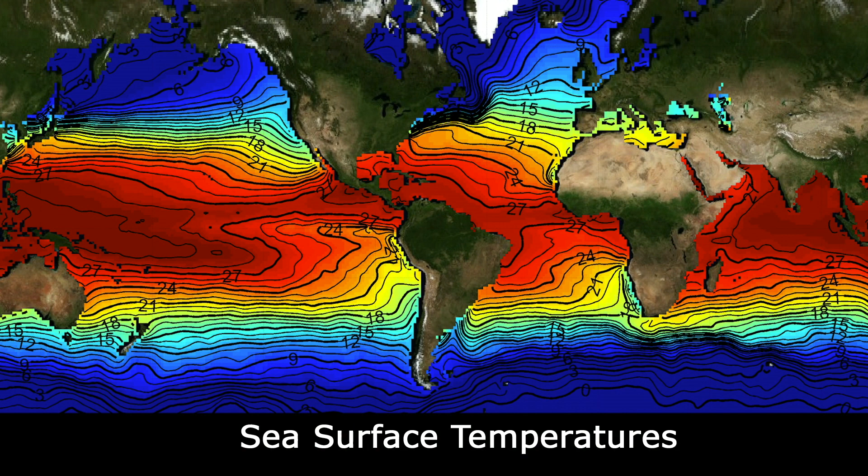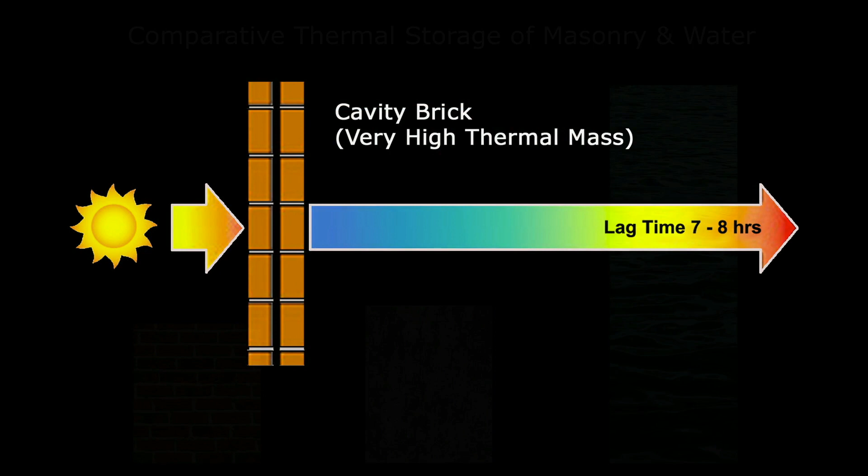This storage temperature keeps the Earth's temperature in range for life, day and night and throughout the season. In the same way, on a smaller scale, heavyweight materials and water can be used to store thermal energy. For example, bricks, concrete and houses have high thermal storage capacity. This means that heat storage can be carried over till the next day, eliminating or greatly reducing the need for additional energy boosting. It's worth knowing that water can actually store twice as much energy as concrete. We call this process mass linking.

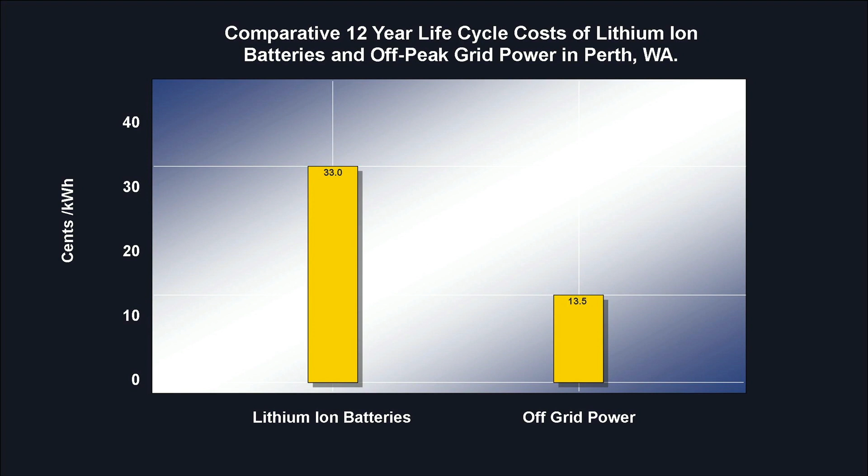So how can thermal storage be used for renewable energy? As predicted by battery manufacturers, new, cheaper, reliable storage systems are on their way. The life cycle costing of batteries is still 2 to 3 times more than off-peak rates. So how can this storage issue be improved economically? Battery storage costs are reducing, but they need to come down a long way.

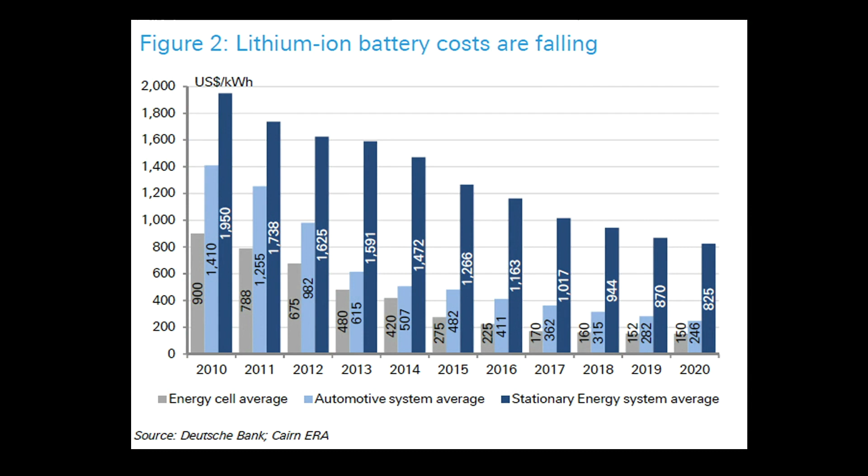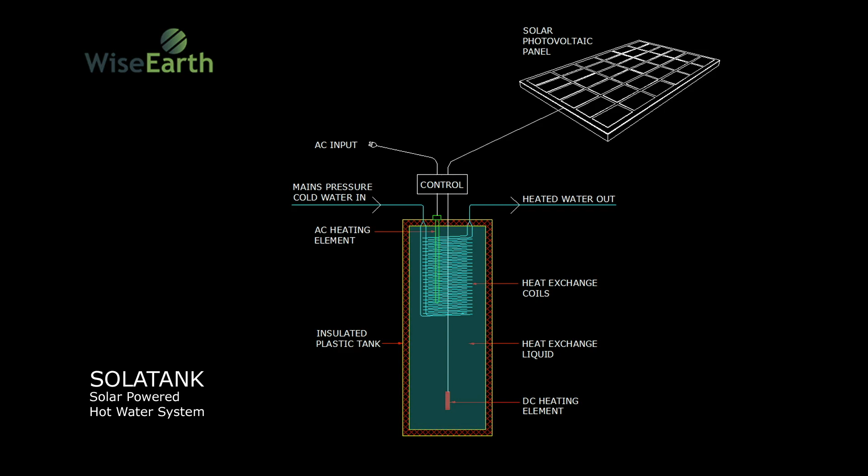What if energy storage costs nothing? Or almost nothing? By storing thermal energy by mass linking in buildings or in hot water tanks, there is a way of storing PV energy for use over 24 hours. It can be used to store PV-driven heat collection from a DC connection or AC to a heating element or heat pump. There are many other ways that mass linking can be adopted.

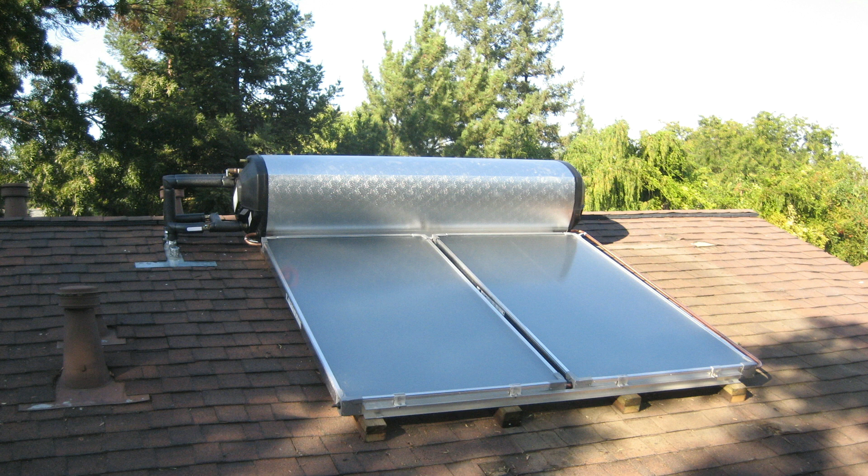Experience in manufacturing hot solar water heaters since 2011 led to a decision to make a truly sustainable solar water heater that was far more reliable and economic. We took a totally different approach to what applied to most solar water heaters, which gained their heat from solar thermal panels. These old solar systems supply hot water to roof-mounted horizontal tanks.

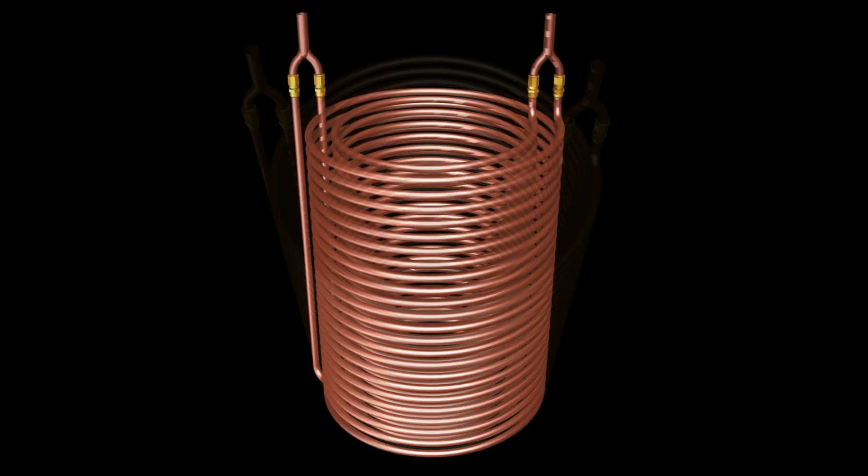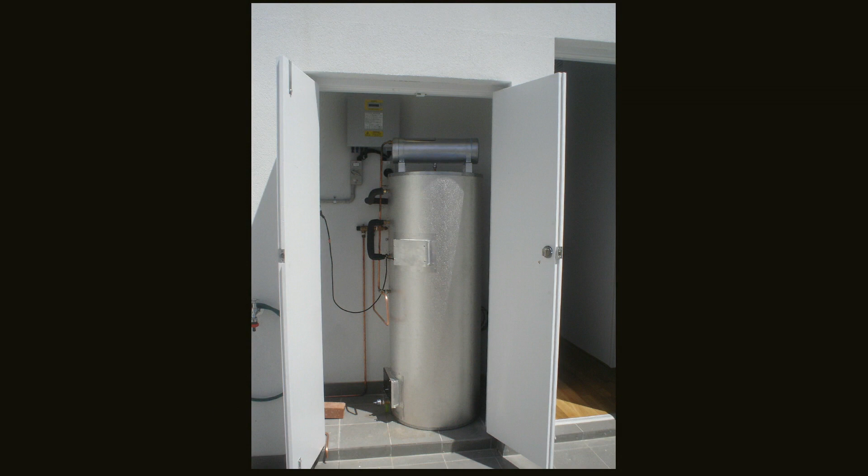Our invention, called SolarTank, takes a different approach and incorporates a mains pressure heat exchange system using parallel coils. The tank is located at ground or floor level, thus avoiding the installation and maintenance issues usually associated with roof-mounted systems. Smaller pipes in the heat exchanger increase the surface area to volume ratio for better heat transfer.

Tests have shown that efficiency is 95.4%. With heating of cold water from the inlet to the required temperature at the tap, it is actually 28% better in this transfer compared to other heat exchange systems that are sometimes used. It also results in a 10% reduction in water usage.

The tank is made of plastic with rib-walled profiles, creating bubbles of air between the shaped insulation, improving insulation of the tank dramatically. All the penetrations are from the lid of the tank and eliminate the need for any wall penetrations. This also reduces manufacturing costs, eliminates metal fatigue, and corrosion problems that are normally associated with hot water systems.

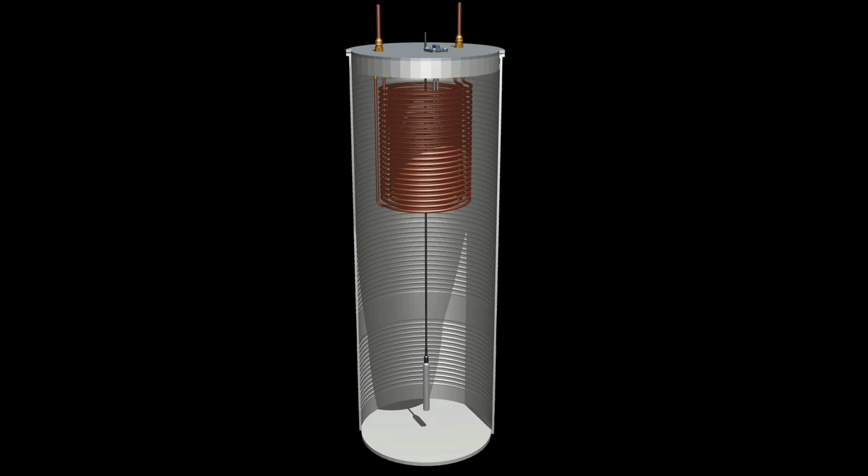The primary heating fluid is treated water. The tank is open-vented, so there is no pressure at all in the tank, and this greatly increases the longevity of the tank.

PV panels supply electrical power to a suspended underwater electrical sheathed cable that is connected to a DC or AC element located near the bottom of the tank. This is the main source of heating during daylight hours.

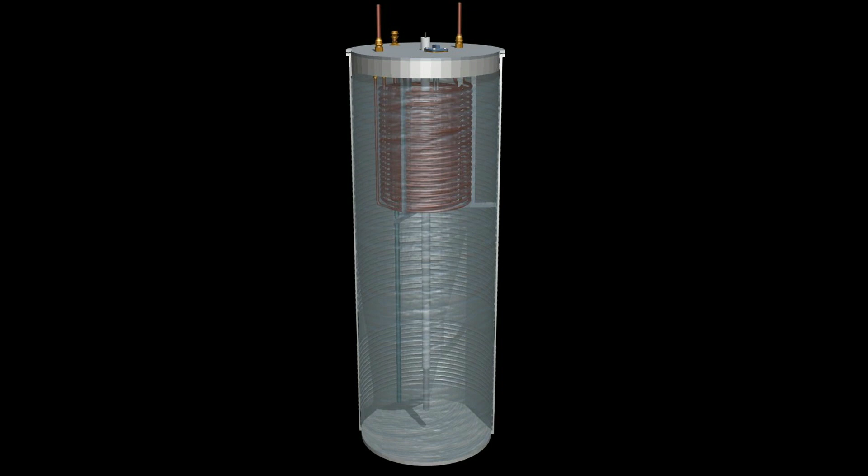A heat pump system can be an alternative approach to heating via the central control pipe at this position. The booster element is an off-peak power AC resistance element that can be active during off-peak daytime periods when there is a glut of solar energy or renewable energy in the grid.

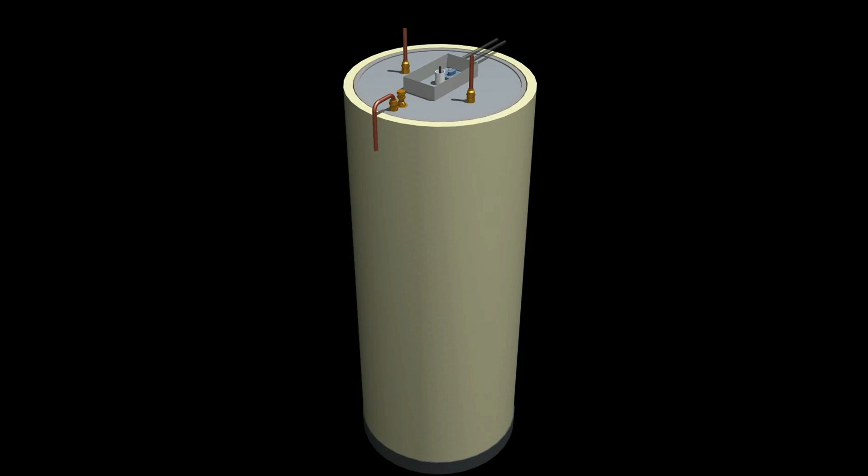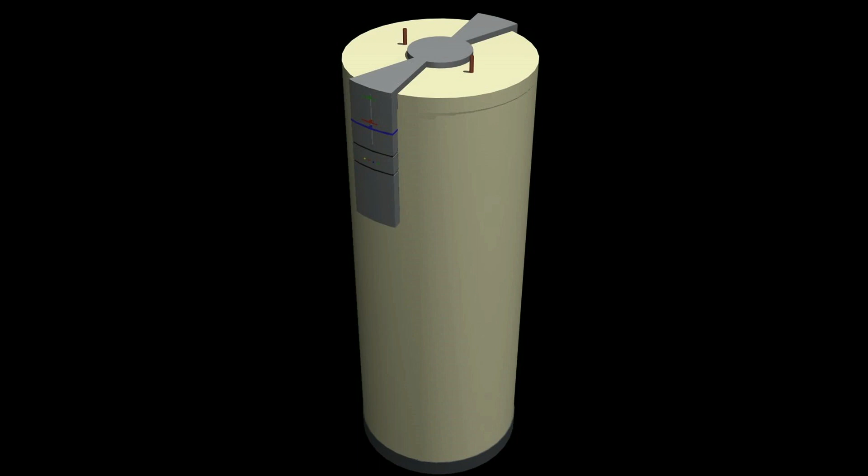Energy costs added are traded off against the main grid-connected PV system for credits achieved during daylight hours. This ensures that SolarTank is directly heated by the DC element during the day and time-clocked to boost off-peak at night, costs being offset by the grid-connected credits for use of the owner's solar system during peak daylight periods, as well as a lower rate when not.

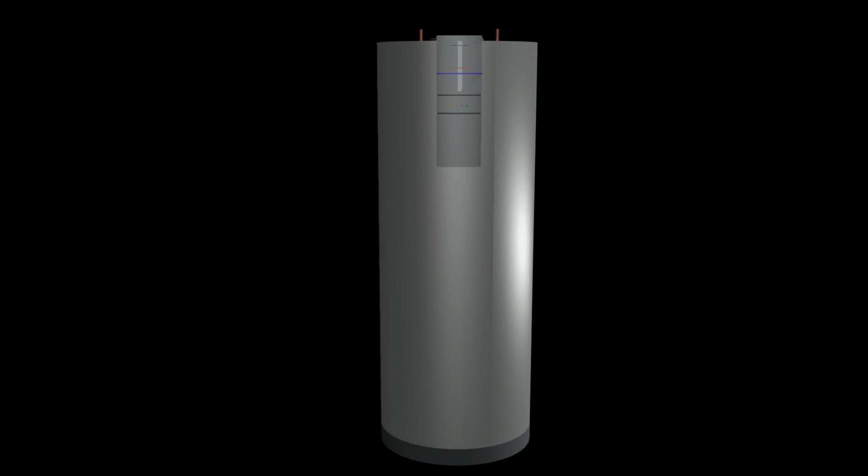This makes the energy bills as low as possible and the capital costs for systems competitive in the marketplace. The product is predicted to last at least 20 years, but will probably last 50 to 60 if maintained properly. It is a unique invention and should be a game changer when fully commercialized.

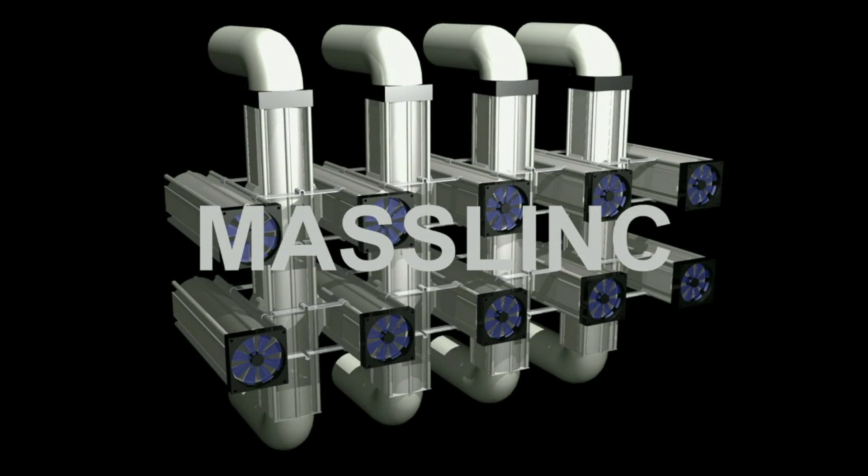Introducing MassLinc. Air conditioning has had increased usage in buildings over the last 2 decades in every residential area in Australia, as well as other countries.

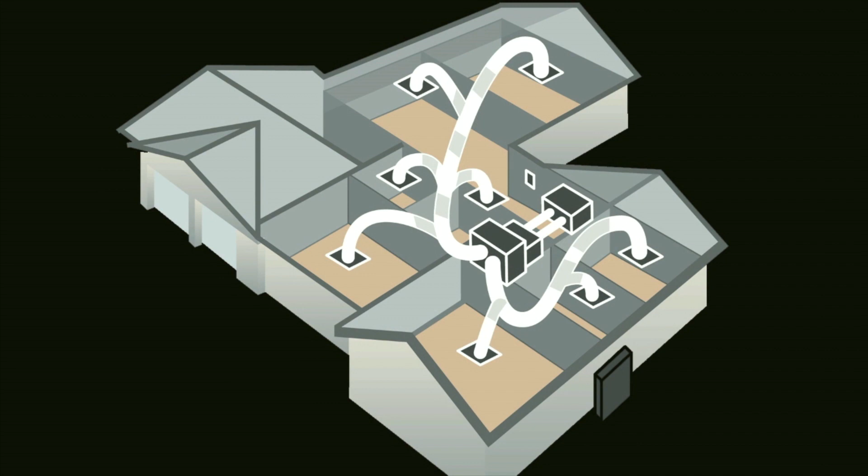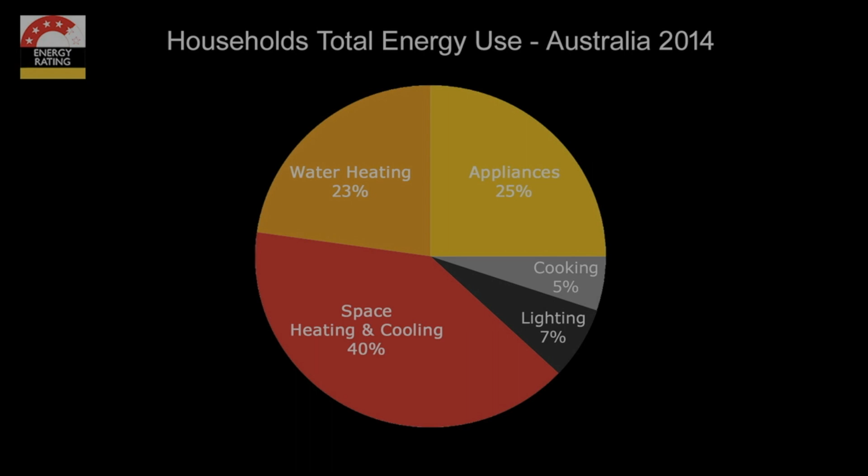Apart from the high cost of installation and maintenance, the energy used is now a major concern in relation to emissions resulting from fossil fuel power sources. Our invention, MassLinc, was devised to lower the need for air conditioning and operate the system during daylight hours, using PV power and utilizing thermal inertia as a night storage medium to maintain comfort.

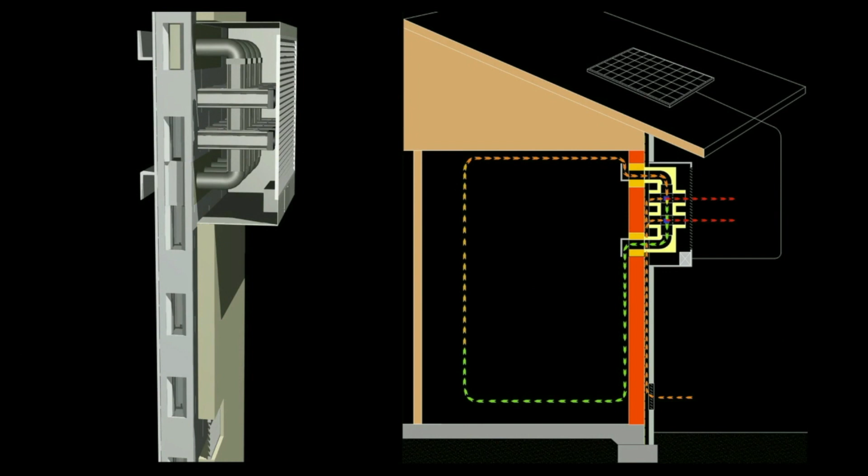The MassLinc system is different to mainstream parallel plate type heat exchangers that to date have always been applied to thermoelectric cells, or TEC, cooling systems. This TEC system is a solid-state electronic heat pump that's already in use in many specialized applications such as computer cooling, military vehicles, and the heating of spacecraft.

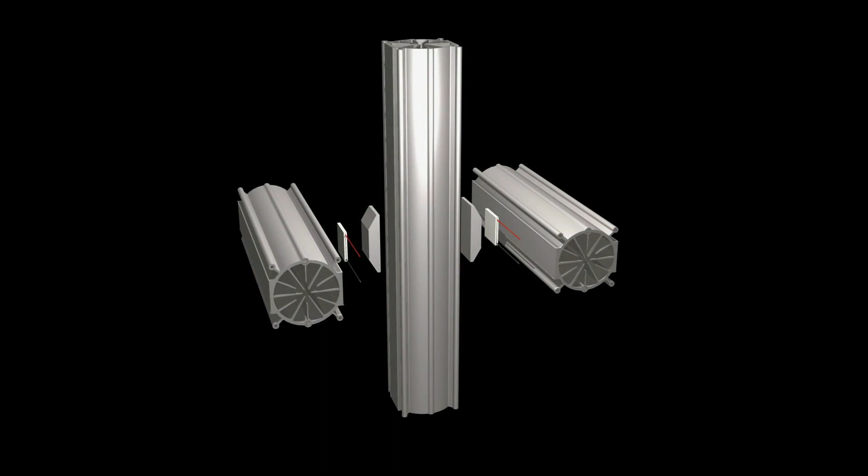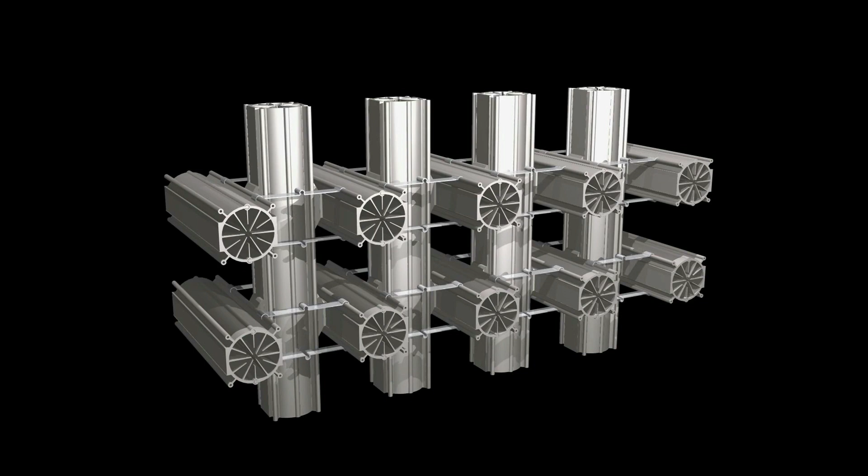The small TECs can be DC connected straight to the dedicated PV panels. The way the power is supplied, the airflow rates involved, the thermal isolation of the tunnels all assure the maximum energy from the TECs is captured in the system.

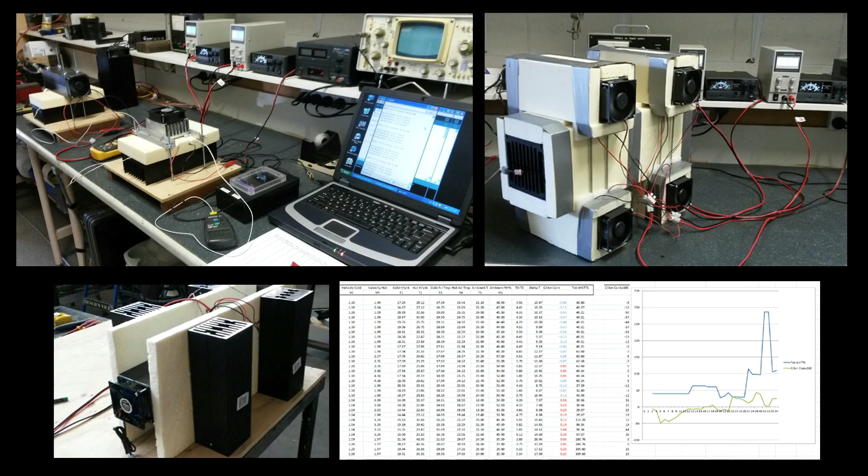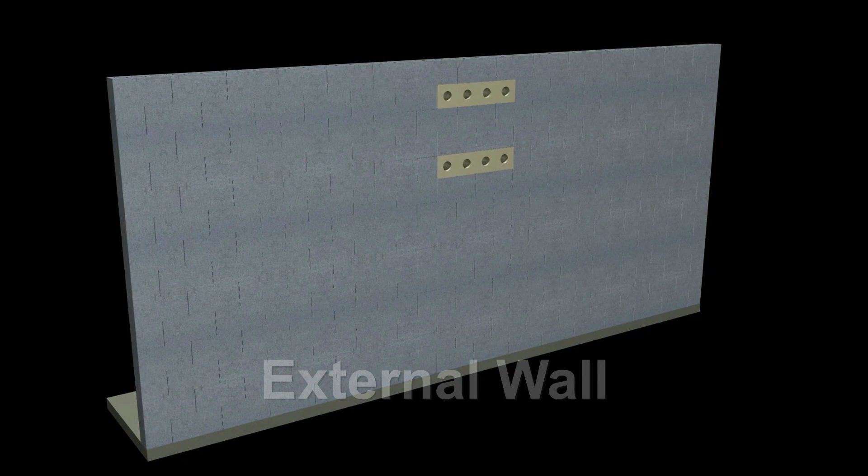Exhaustive testing and analysis has confirmed the efficiencies claimed in our patents. The heat rejection part of the system is similarly linked to the cell via these same type of air tunnels. The cavity wall of the house and thermal inertia in the external leaf in the perimeter of the cavity wall uses part of the MassLinc operating system. As a result, we have named the wall system MassWall.

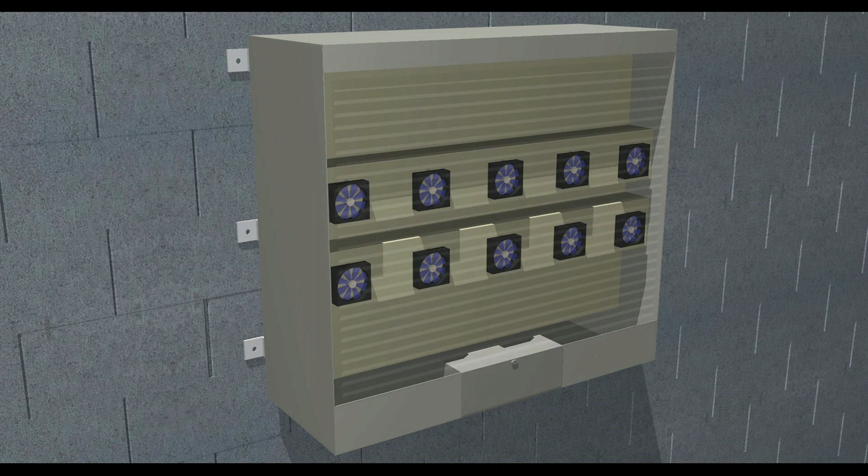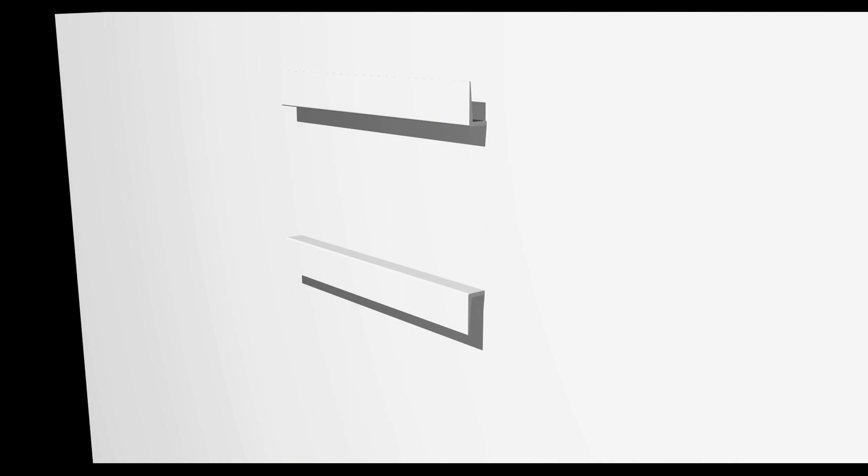The MassLink package unit is very neat and visually acceptable compared to normal wall-mounted air conditioners. An upward-facing pelmet is fitted to the return inlets near the ceiling level and distributes the air in the room after first passing by the mass in the wall itself. It may be simply a projecting panel or wall projection. It's up to the architect or interior designer to come up with a pleasing aesthetic.

The visual potential is much better than the usual wall-mounted systems or ugly bulkheads that usually occur in most designs. The system can be retrofitted as part of a cavity wall construction or built as a special mass wall configuration as shown in this presentation.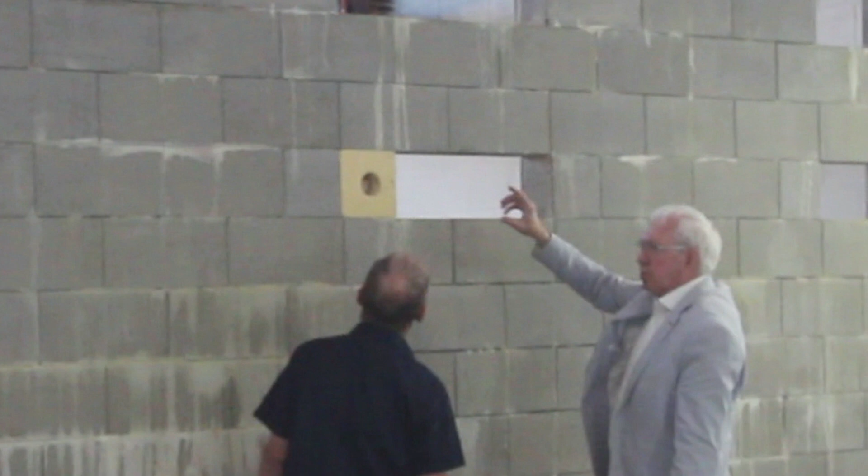The last 4 years of innovative investment have been interesting. The motto of Innovate Australia is ideas into value. But I would say that the first step is to come up with not just ideas, but good ideas. What are the advantages of our new technologies from a local and global perspective? Let us explore the basic facts behind the innovations described in the video.

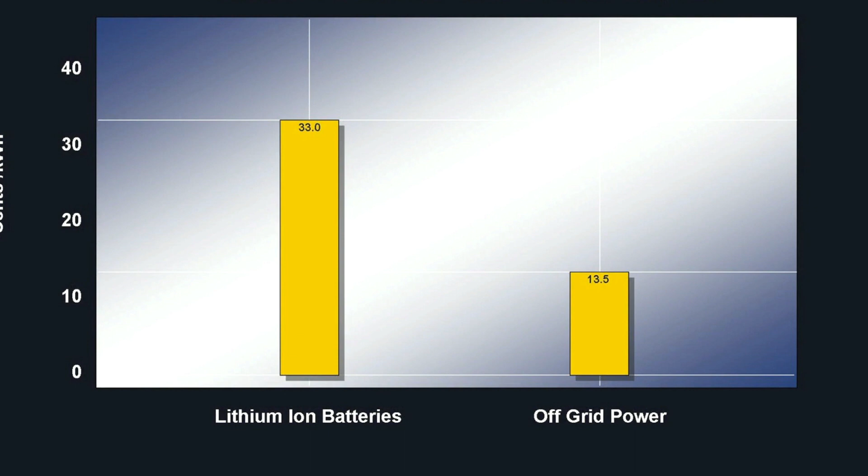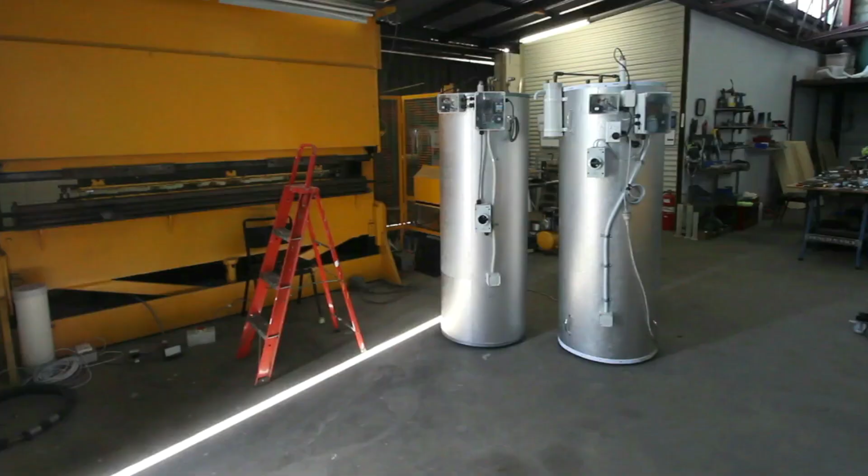The grid acts as a very reliable virtual battery for grid-connected solar. Therefore, battery costs need to be reduced 50 to 60% to be viable, but they are ideal for nighttime general power and lights. Batteries will never compete with storage for thermal applications. Thermal storage systems are simply perfect for thermal applications. They don't need batteries in grid-connected areas.

So let's look at the facts behind SolaTank. For providing hot water, life cycle assessments indicate 2 to 3 cents a kilowatt hour over a 60-year period, also 5 to 6 cents a kilowatt hour over a 20-year period. Both life periods are very attractive. We are using a 40-year life with 4 cents per kilowatt hour cost for all our comparisons.

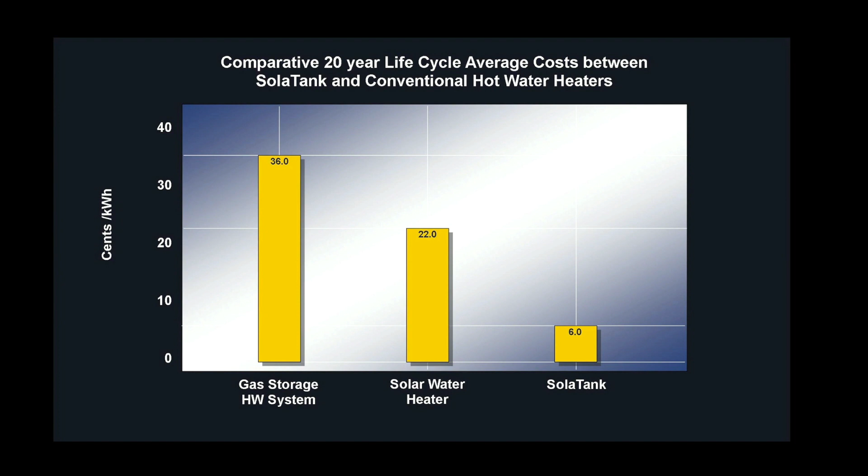As shown at Murdoch University, the life cycle costing for a conventional solar water heater is 18 to 24 cents per kilowatt hour. That versus 36 cents per kilowatt hour for a conventional gas storage system. Therefore, we can see a SolaTank should be up to 4 times cheaper than a conventional storage system over a 20-year period, and 8 times over a 60-year period, but also last 2 to 6 times longer.

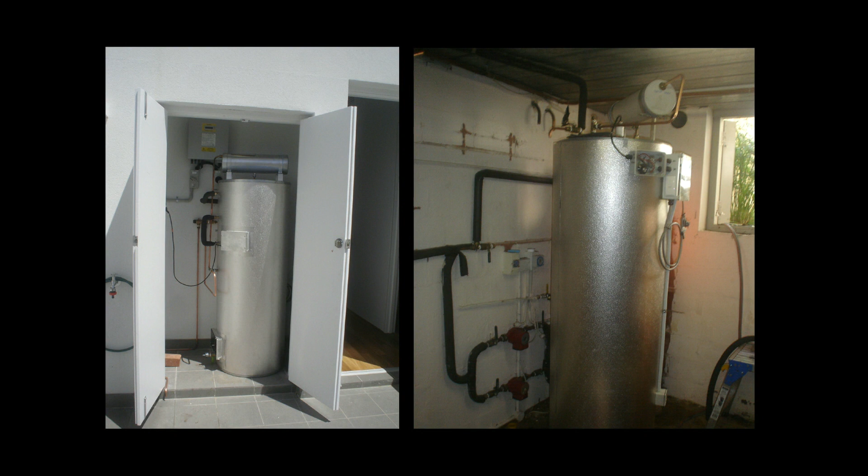So summarizing the benefits of SolaTank. What are the improvements of SolaTank over traditional solar water heaters? That is the question. The DC or AC booster provides 50% versus 10% of solar contribution midwinter. If on the smart meter using daylight energy, it is actually 100% renewable energy for the grid at 8 cents per kilowatt.

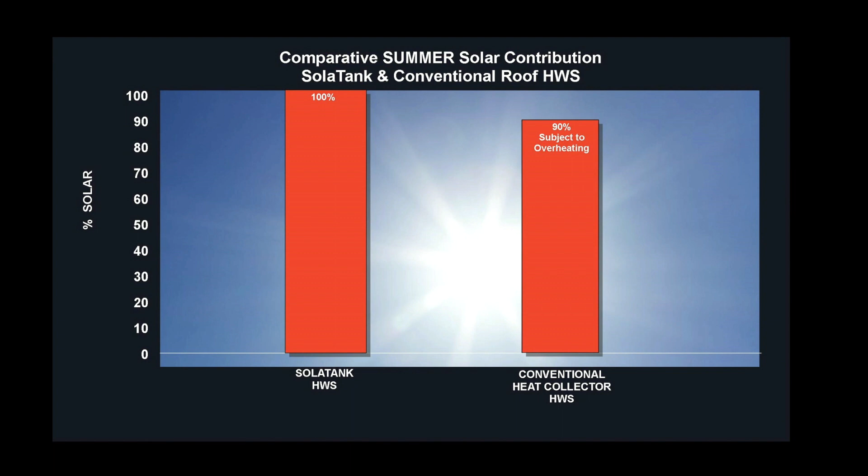All the boosting is done off-peak, day or night, and when combined with the extra solar contribution, the saving is about $2 to $6 per day, depending on water use. This amounts to $120 to $360 savings on midwinter energy bills in temperate climates such as Perth.

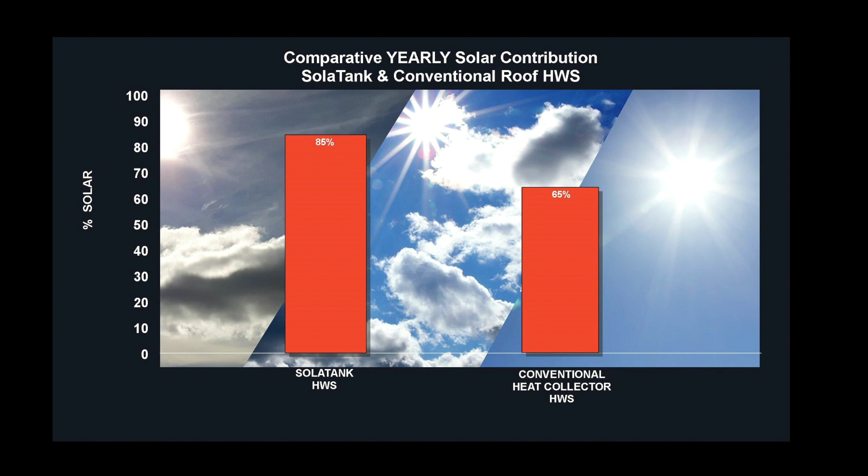In spring and autumn, the solar contribution for SolaTank is 85% versus 50% for traditional solar systems. In summer, it is 100% versus 90% for commonly used solar systems. The tank never overheats as a result of excess solar exposure, as is the case with traditional solar water heaters, adding years to the life of the tank.

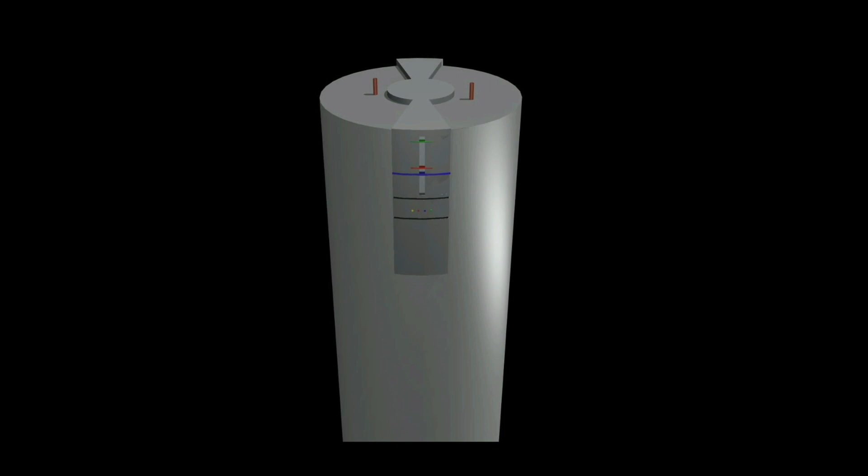Over the full year, the solar contribution is 85% to 100% versus 60 to 70%, which is ideal in Mediterranean-type climates, the general range being cool to warm temperate climates. The design is adaptable for all climates with modification to some of the components. Basically, it uses more solar energy and is more cost-effective. SolaTank has a much cheaper boosting regime than what is possible with traditional solar water heaters.

Costs? It should be around $1,000 less than the usual cost of installation. Supplied and fixed, and only take 1 or 2 hours to install. Maintenance is negligible and will last a very long time. It is twice as good economically and lasts 2 to 4 times longer. It will be cheaper when mass-produced.

Comparing with gas or electric storage units, it is 8 times as good economically when looking at the real cost over the life cycle. It can also be connected to existing PV systems.

Let's take a look at the facts behind the MassLinc air conditioning system. Research carried out in 1993 confirmed that reductions of 30% of energy bills is attributable through passive solar design and night ventilation of thermal mass.

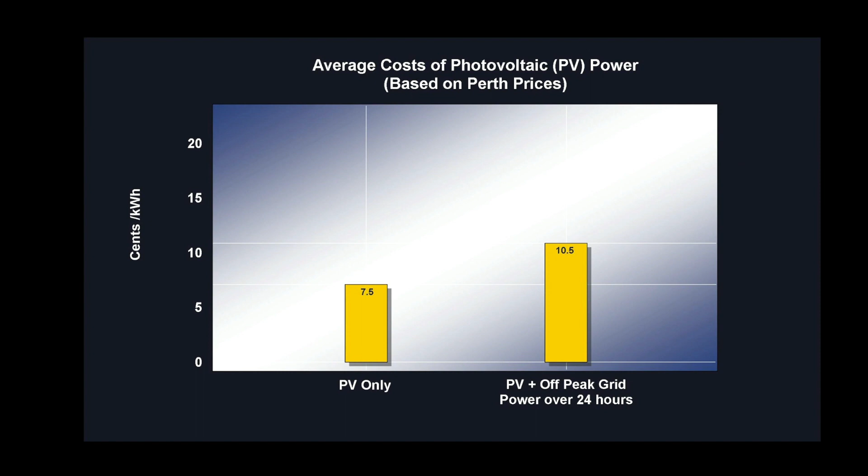Before going further, it is worth understanding the economic realities of PV systems. It needs closer scrutiny. PV costs currently are around 5 to 10 cents a kilowatt hour, but are coming down fast. When combining general power use of PV and off-peak over 24 hours, it averages 9 to 10 cents a kilowatt hour. To understand how MassLinc works, we really need to look at the coefficient of performance, or the COP.

This is the thermal energy generated relative to the energy supplied. For example, a COP of 2 means that twice the thermal energy comes out of 1 unit of electricity. Refrigerative heat pump systems are usually 3 to 5 or above.

Mechanical exhaust ventilation, cooling thermal mass, comes to about 20 or above. Direct evaporative cooling is 12 to 18, and indirect evaporative cooling is 10 to 15.

So what is MassLinc's COP under its operational parameters? A COP of about 3.5 to 9 and above is achievable for heating and cooling. This relates to experiments in a temperate climate range.

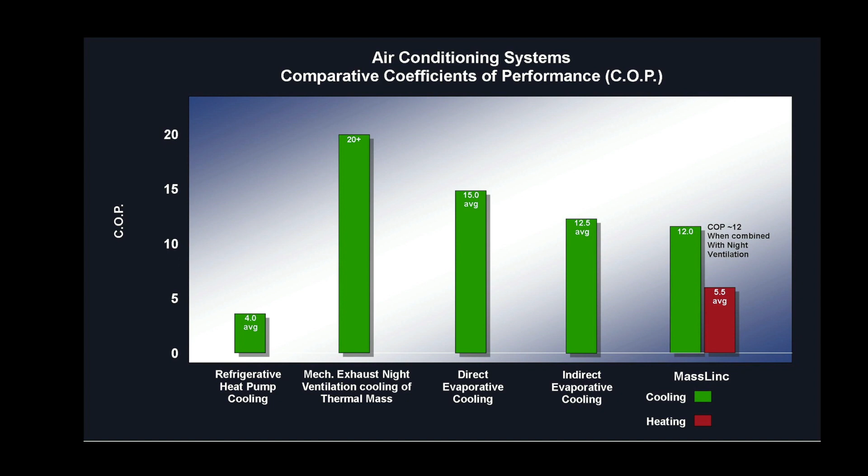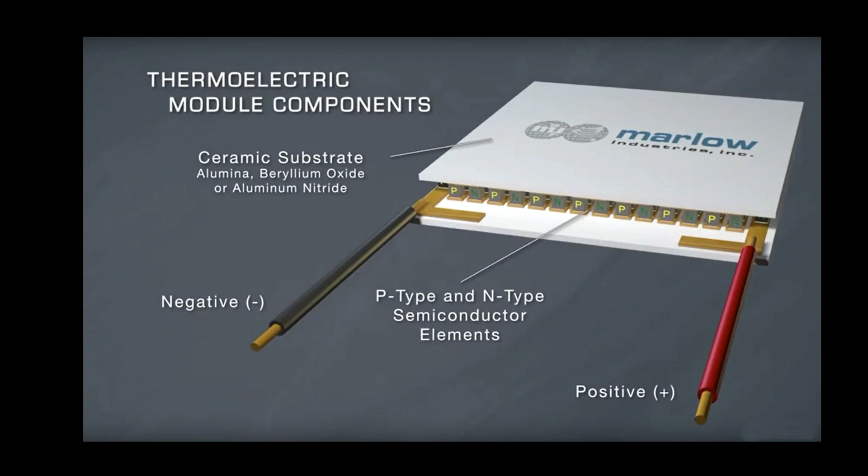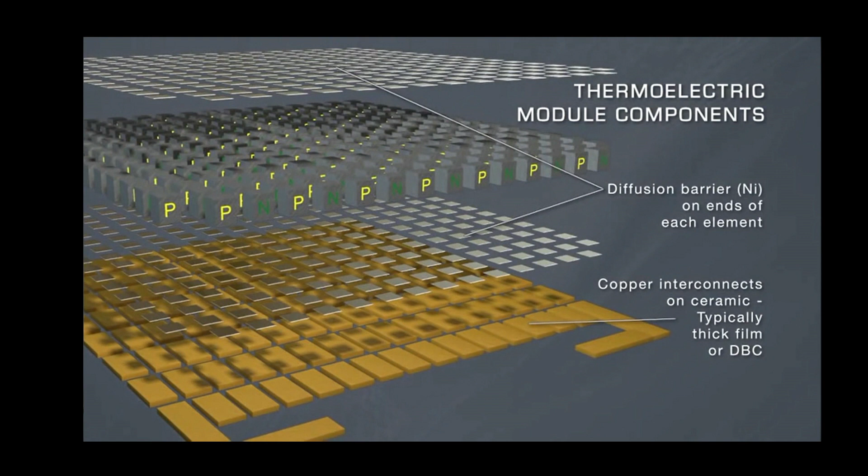The original thermoelectric cell was discovered between 1821 and 1836. Its function in physics is known as the Peltier effect. Since 2000, improvements in cells and the cooling of computer systems opened up creativity for the world in this area of research. The efficiencies achieved in testing have been excellent, but we have to think out of the square.

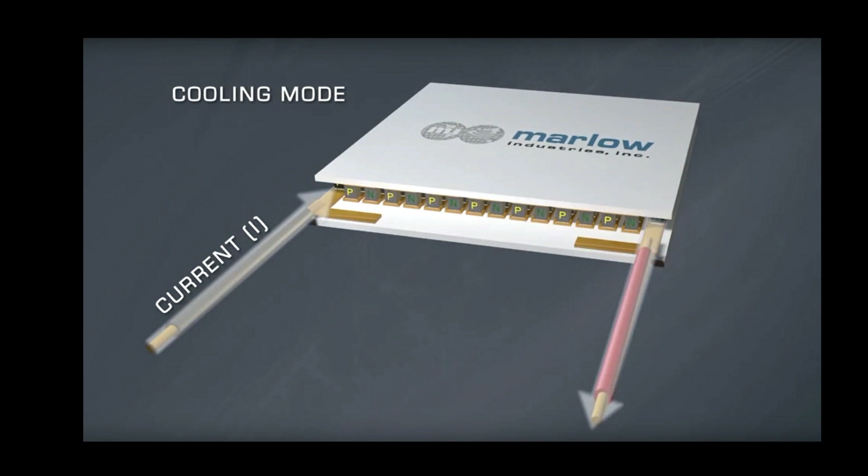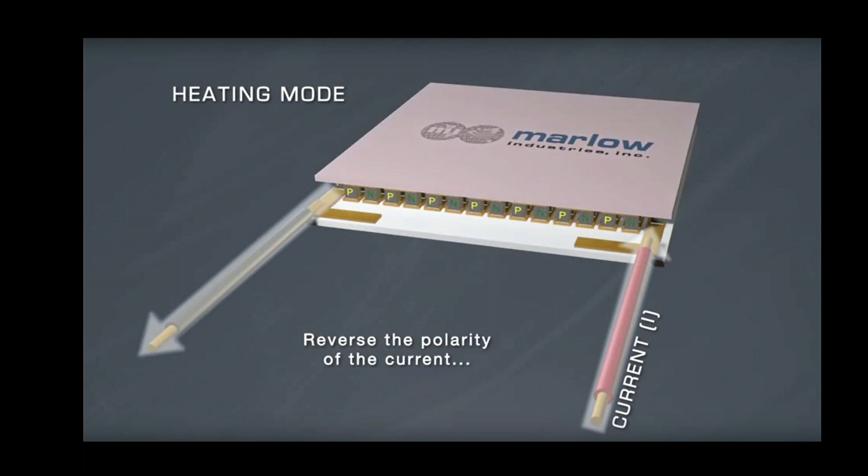We've got a 6-fold increase compared to that normally expected of TECs. This is due to the configuration of the embedded system and the management of the energy source. And it's not the only method that can be applied to energy-efficient passive solar building. It has potential uses in conventional and hybrid air conditioning systems as well.

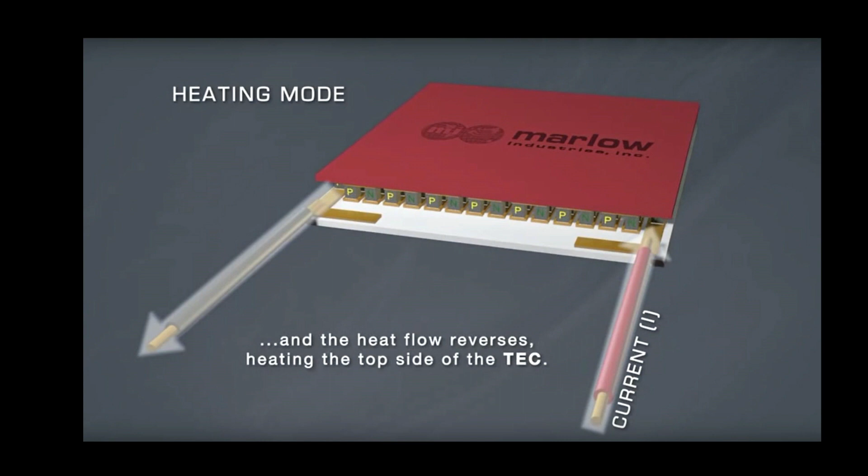The main point in all this is the potential cost savings to building owners are immense. Current air conditioning technologies cost between $2,000 and $3,000 at peak cooling power, and recently will be rising since the COVID pandemic. This means that the life cycle capital cost implications for traditional air conditioning systems over 60 years is between $4,000 and $6,000 of peak kilowatt cooling power.

MassLinc systems using TECs probably cost around $1,000 a peak kilowatt of cooling power. However, over 60 years, this would be around $1,200 of peak kilowatt cooling power. This is very, very attractive.

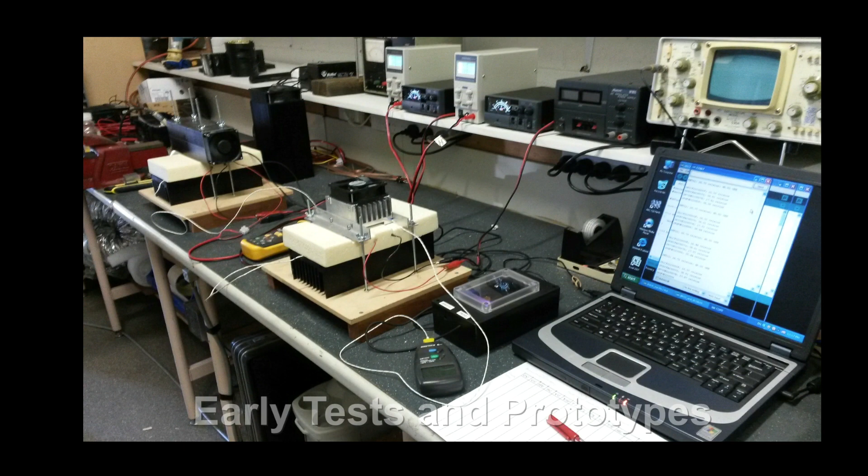MassLinc maximizes the theoretical COPs of the TECs by reducing the steady flow temperature difference of the hot and the cold sides of the cell. It keeps it well below the 10 degrees, imperative to get the higher COPs.

When applied to a new generation of energy-efficient buildings, MassLinc will be a significant step forward for lowering emissions and saving energy. Most of the operational time this temperature difference will be kept at 4 to 6 degrees Celsius, and often less than 2 degrees, so it will work well.

This is due to the linking of the cavity wall system, and also this is achieved by lowering the electrical power supplied to the cell, being the voltage and the current. Though applied in an unconventional way, the MassLinc system is a potential game changer in the heating and cooling of buildings.

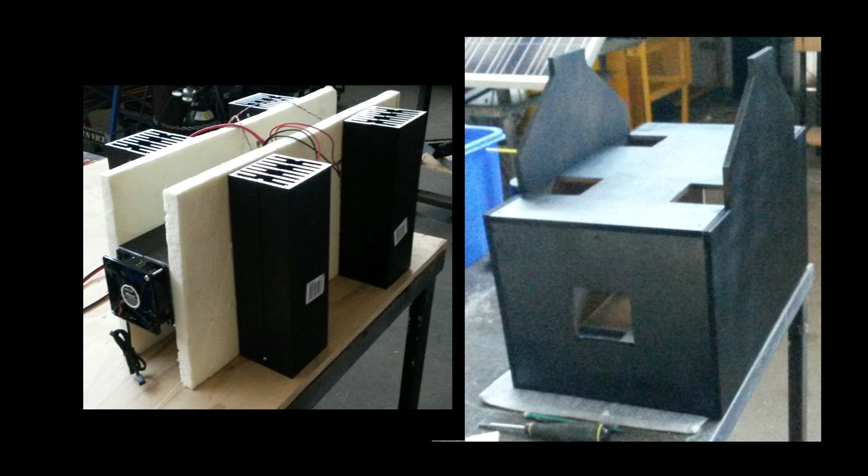The benefits are listed as follows: saving energy for heating and cooling by storing PV energy into the mass of the building during daylight hours at about 5 cents per kilowatt hour or less. Combined with night ventilation, an average COP over 24 hours will be around 12.

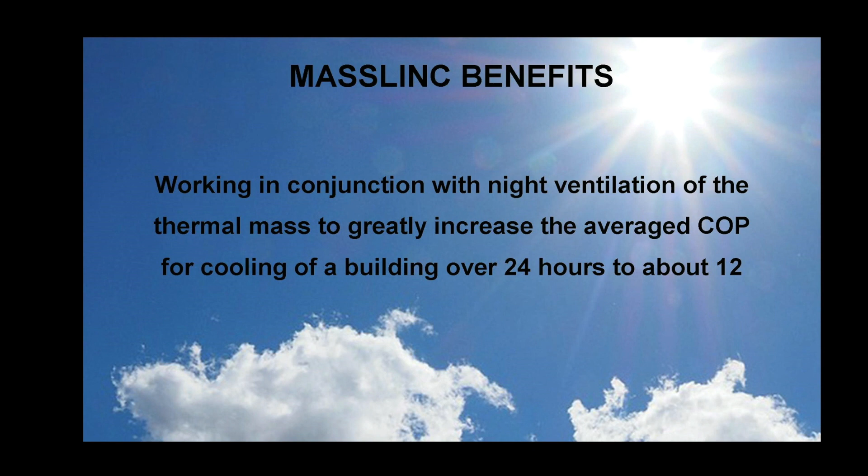This will reduce the energy costs of the passive solar mass cooling strategy to about 1 to 2 cents per kilowatt hour over a very long time, say around 60 years.

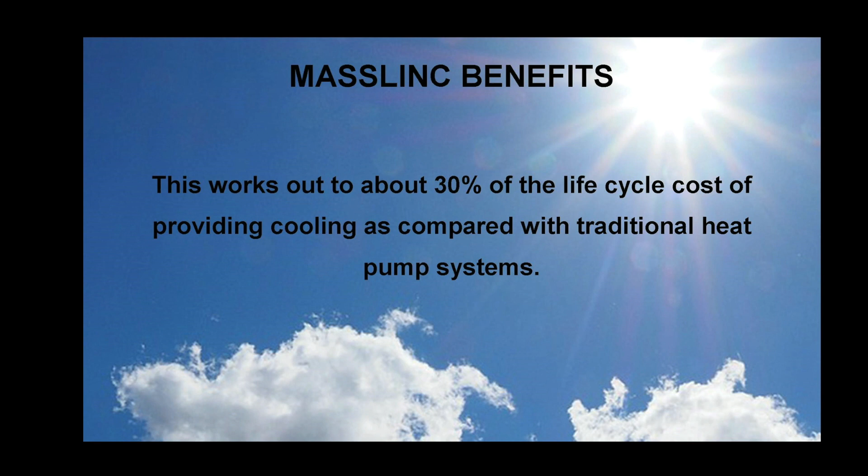This works out to about 30% of the life cycle costs of providing cooling as compared with traditional heat pump systems. Heating has similar economics, giving 70% savings. We have used 4 cents per kilowatt hour as an average for comparisons with life cycle costs of traditional systems.

It has viable use as a hybrid air conditioning system with a conventional commercial plant providing solar-driven fresh air ventilation, and 60 to 75% savings during daylight hours providing there is fresh air. This amounts to 30 or 40% of the air conditioning bill in most buildings.

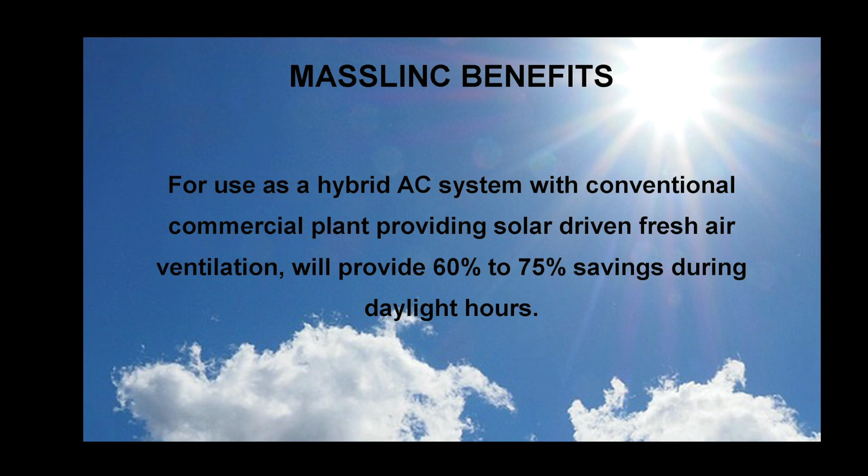If batteries are considered for nighttime use of air conditioning, the comparison savings using the MassLinc strategy are more like 85% savings or above. So all round, the economics of MassLinc are outstanding.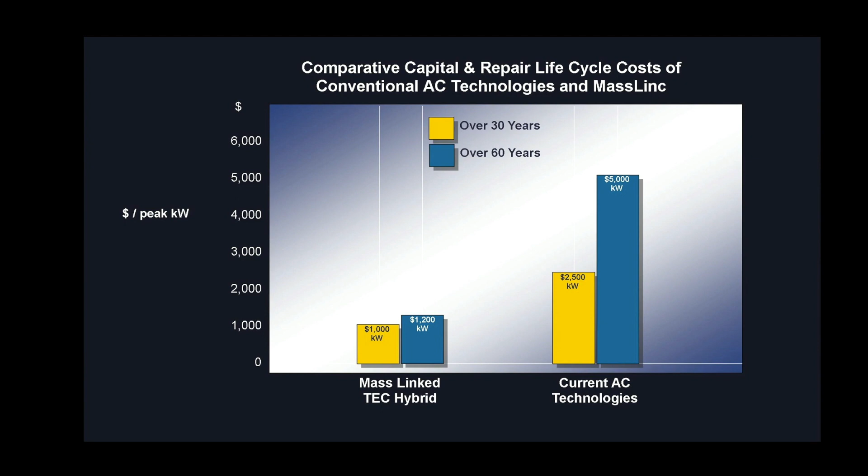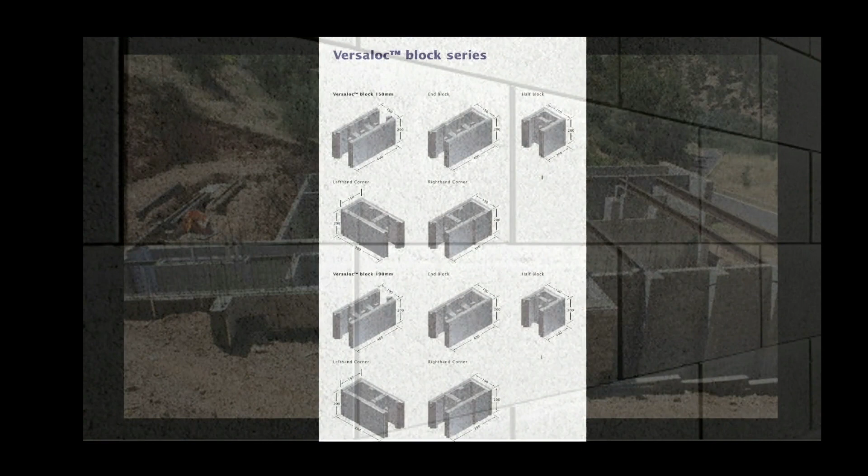MassLinc should be around 30 to 50% of the cost of conventional air conditioning to install and maintain over a 30-year period. The Mass Wall construction system is also a Wise Earth Research Centre innovation.

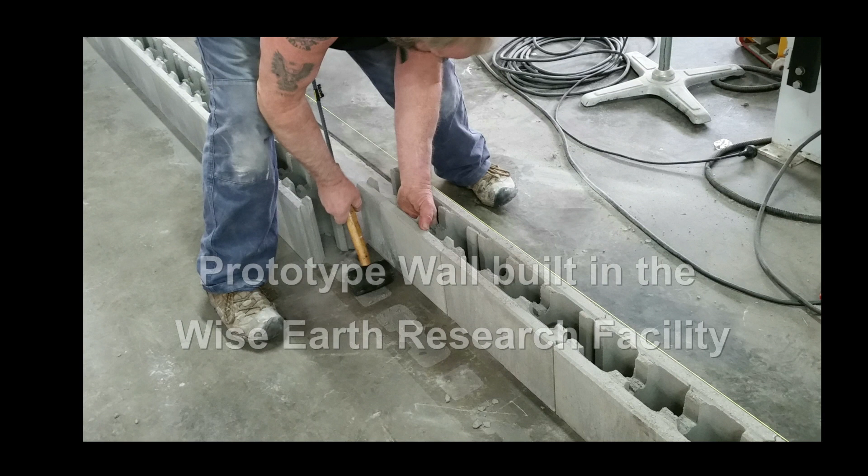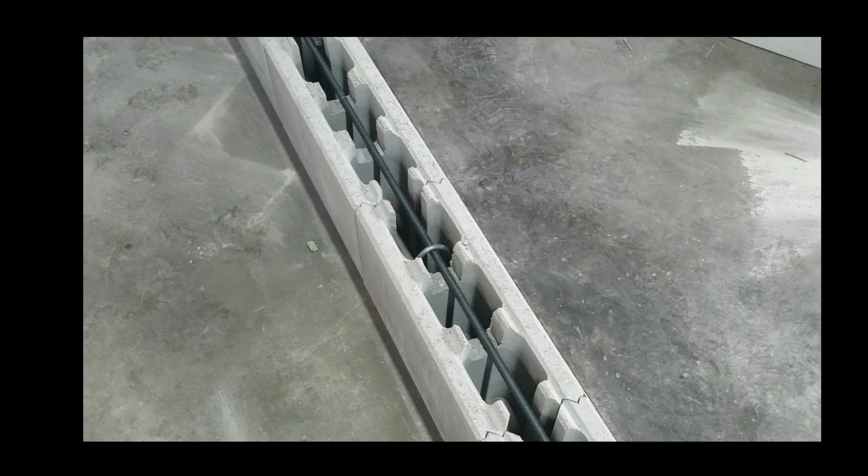This has been done in conjunction with Midland Brick Limited, who manufacture brick products in Western Australia. A special wall system has been designed and is undergoing further development, based on licensed German technology, which is the core of its structural and thermal features. Other alternatives are under investigation, using green concrete filling that may improve the cost and speed of erection time.

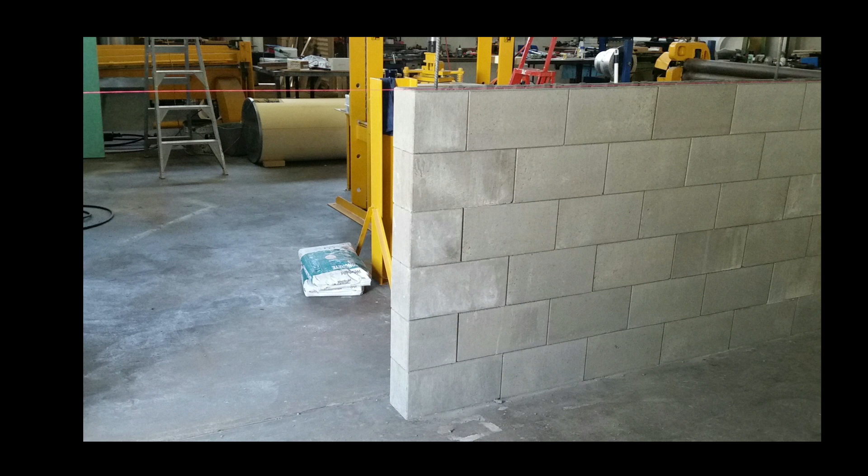MassLinc has been designed to dovetail into this new construction system. During the commercialization of MassLinc and the MassWall systems can be monitored in real time over a 12 to 18 month period once a demonstration building incorporates the integrated approach.

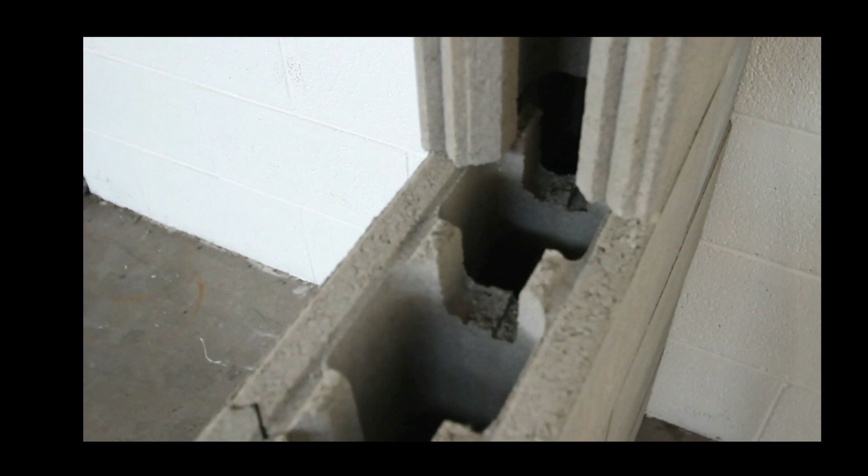We predict that the total system will be ideal in small-scale developments, such as low-rise residential apartments up to 4 stories and smaller infill projects. Also, mixed-use, commercial, and light industrial would be a good demonstration of the total systems.

The system assumes night ventilation and/or day cooling from MassLinc, using both PV and off-peak power coordinated by a special control system. It will deliver human comfort and negligible energy bills.

The team's cooperative objective is to develop MassWall as an alternative construction system for more widespread adoption later. Projects are currently being identified, and a new thin brick is being developed for the external skin of the wall.

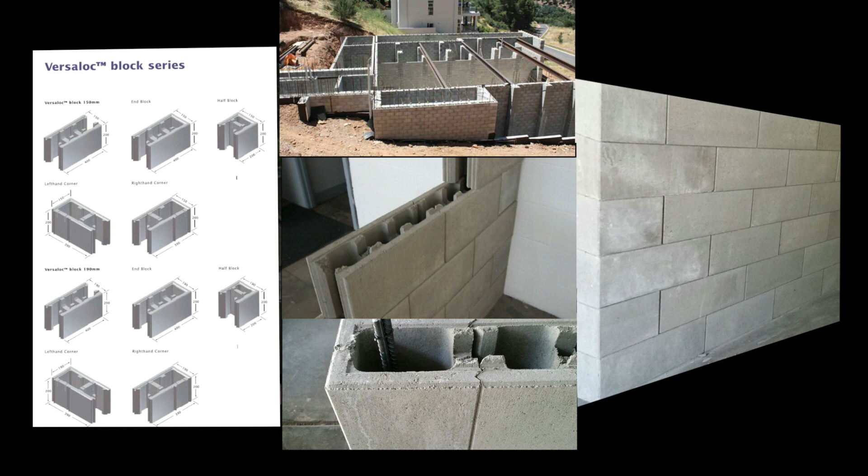Once these technologies have been completely verified and the JV construction formed, we will be ready to start building and integrating our technologies. Meanwhile, they can be demonstrated in buildings already built in a variety of climates in Australia as a comprehensive trial. All our technologies planned for this commercialization phase.

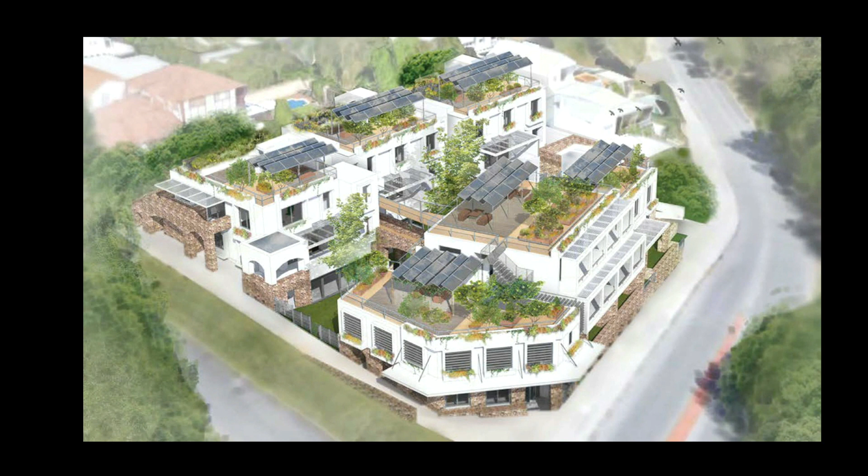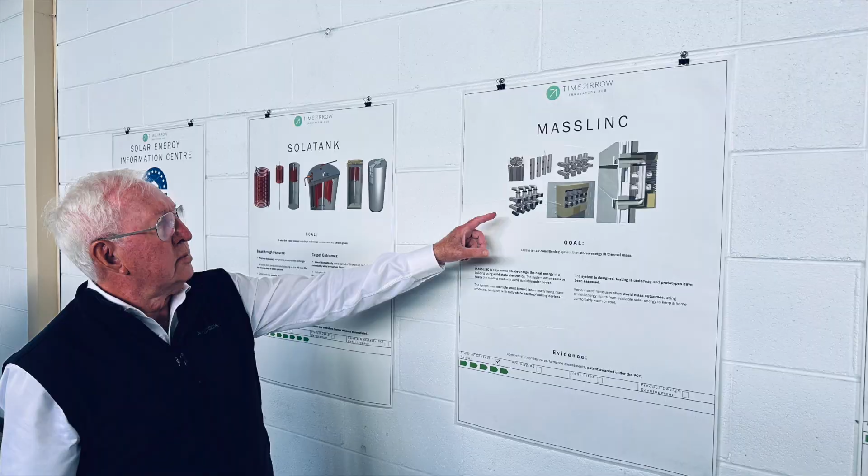A plan for integration into the Swanbourne Precinct Development Trust project, which originally was to be known as Ilios, which is Greek for sun. However, delays and economic circumstances have forced us to apply the technologies in another project out at the Bayswater Precinct as part of the Innovation Drive project.

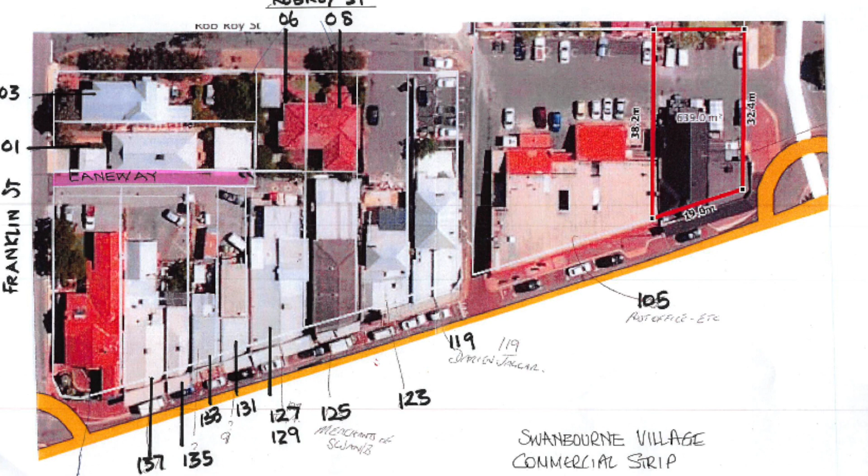Another planned project identified for ongoing demonstration is the Railway Precinct at Swanbourne on the commercial strip. Once these projects get approved, they should be a catalyst for further integration for infill development by the industry generally.

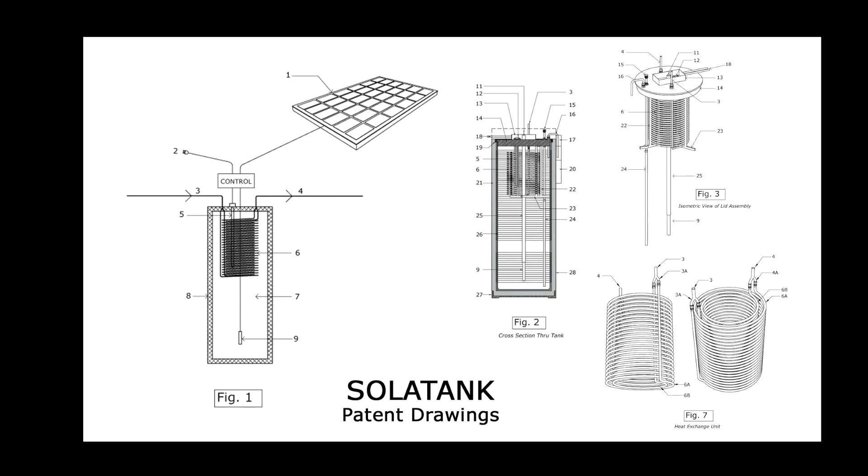Commercialization starting with provisional patents have been submitted for both SolaTank and MassLinc, as well as other IP protection has been assured. We have been granted patents now in most manufacturing locations.

Wise Earth has been operating for many years under the support of the federal government Research and Development Tax Concession Scheme. It has placed our team in a very strong position, as all aspects have been explored before starting a full-on commercialization process. Strategic allies, collaborating universities, and industry partners are now being sought.

We envisage a period of intense work of 3 to 4 years once the capital has been raised.

Joining the team for the commercialization phase is Tony Fitzgerald, who was a former MD of the famous innovation company Orbital Australia. He plans to be an advisor to the board once the capital is raised. He has been a co-director along with Professor Wasim Saman from UniSA, who reported on the initial testing.

A restructure of the board will occur once the participants in the commercialization have been decided.